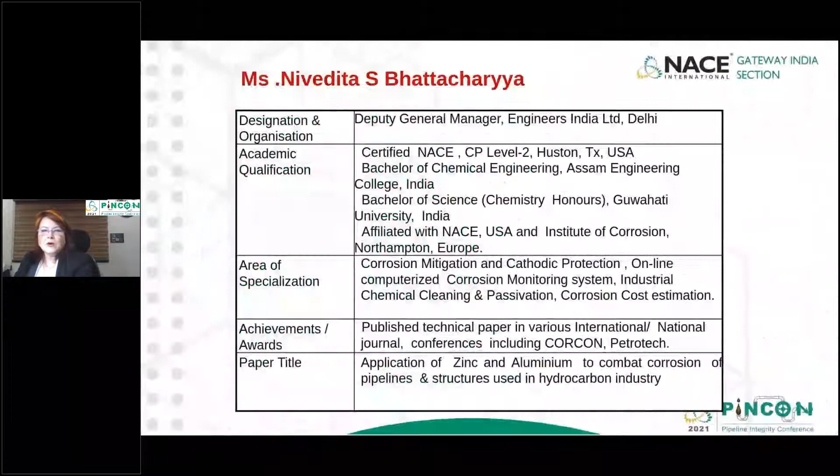Today I'll be speaking on application of zinc and aluminium to combat corrosion of pipelines and structures in the hydrocarbon industry. Why is corrosion control important? To preserve our asset, to reduce maintenance cost, to reduce inspection cost in the industry, to follow company and government regulations, and preserve the environment.

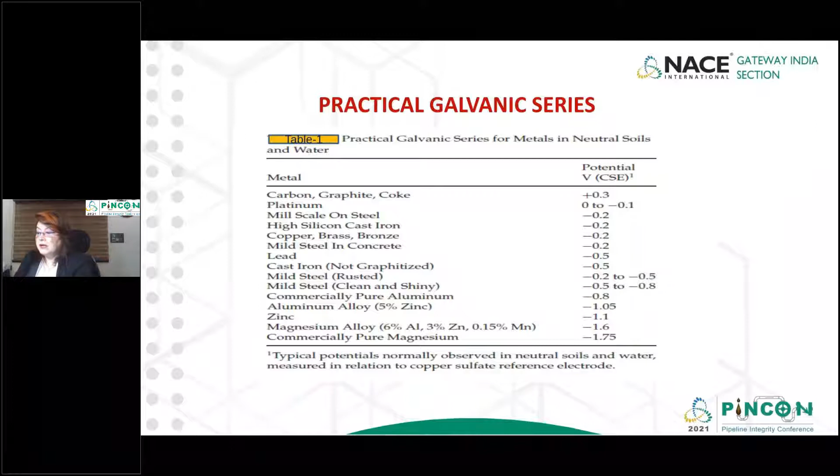Zinc and aluminum are the most abundant metallic elements in Earth's crust. It has been observed that in practical galvanic series with respect to copper sulfate reference cell, the potential of zinc is minus 1.1 volt and aluminum alloy is minus 1.05 volt in neutral soil and water.

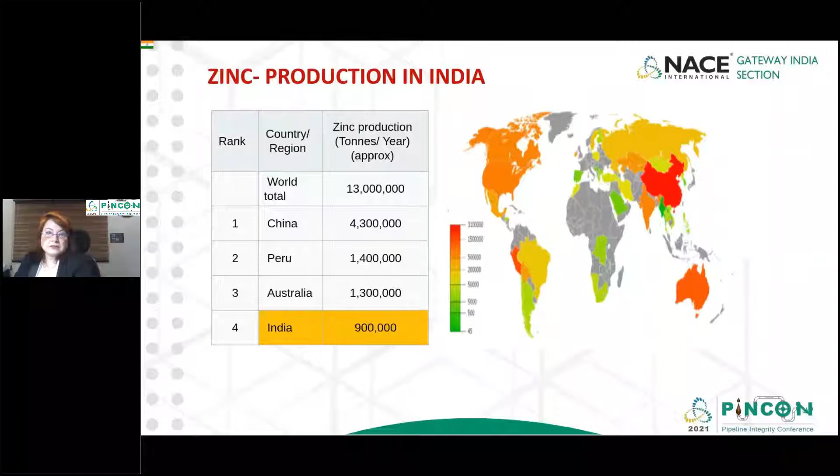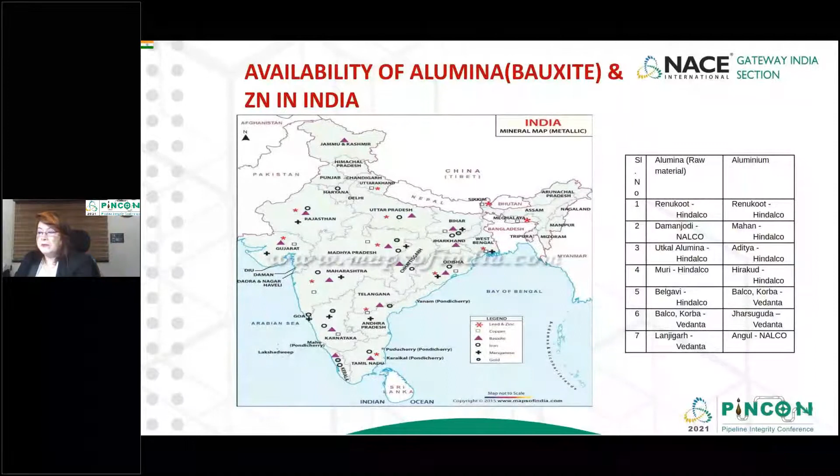At present, India has the fourth largest deposit of zinc and approximately 0.9 million tons per year production. Similarly, India has the fifth largest position of bauxite deposit in the world, which is the ore of aluminium. As you can see in the map of India, availability of alumina and zinc in different parts of our country.

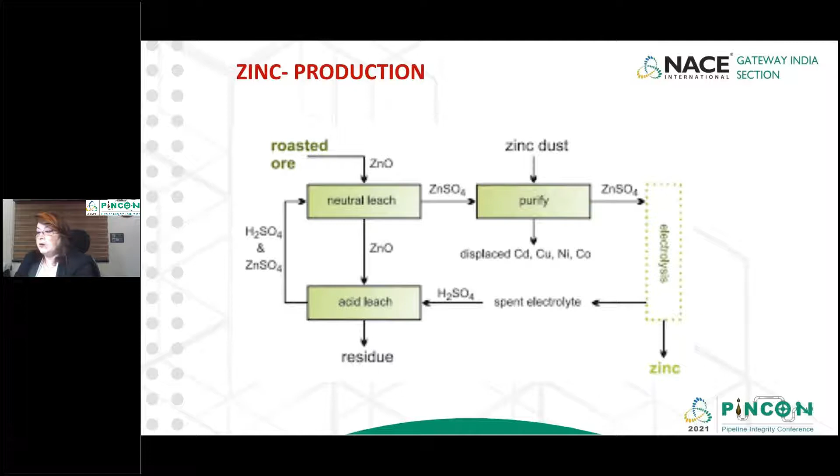Zinc is processed from zinc ore and releases sulfuric acid during production. The production of final zinc metal is a complex process involving various stages with the end goal of separating the pure zinc from the zinc ore.

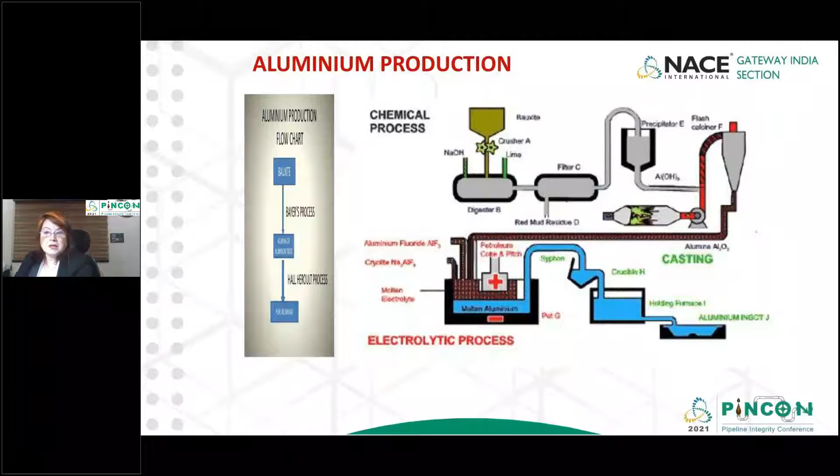Aluminium manufacture is accomplished in two phases: the Bayer process of refining the bauxite ore to obtain aluminum oxide, and the Hall-Heroult process of smelting the aluminum oxide to release pure aluminum. The Hall-Heroult method of aluminum production occurs in large refractory lined steel containers called pots that are connected in series and housed in long buildings called pot rooms.

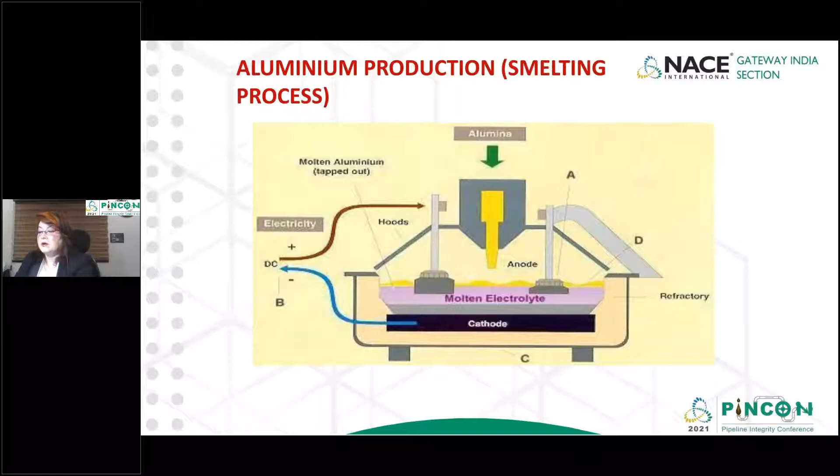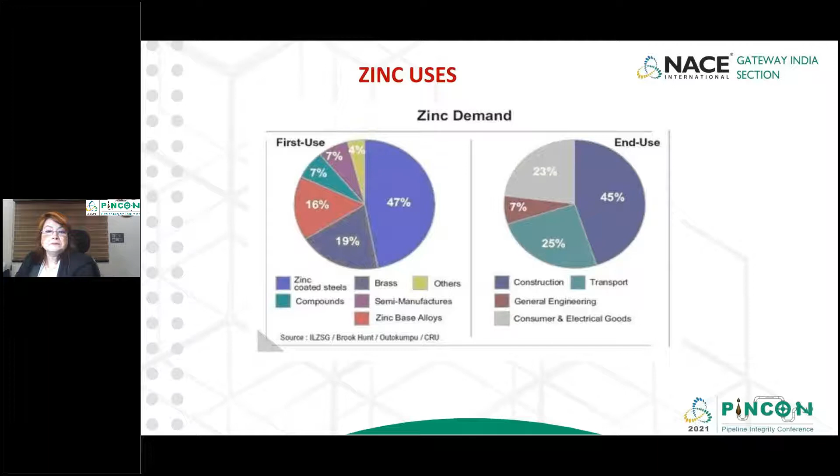As per the commodity market report and global zinc report, there is a huge gap of zinc between supply and demand in the near future.

Zinc and zinc alloy are used in various forms of coating and galvanizing carbon steel to prevent corrosion of steel, zinc alloying in brass and bronze and more, making the metal for wider application in Indian hydrocarbon industries.

By applying zinc coating for above ground various structures like piping and pipe support, pipe hangers and flanges, vessels, pipe racks, structural supports, and enclosure of test link point of anode and cathode junction boxes, transformer rectifier unit enclosures, rebar in RCC structure, etc. Similarly, for buried structures, zinc anodes are used during construction stage in low resistivity soil, seawater, offshore platform, jetty piles, ships, etc.

Hotspot protection of buried pipelines. 99% pure zinc can be used as a reference cell. Electrical earthing system of structure.

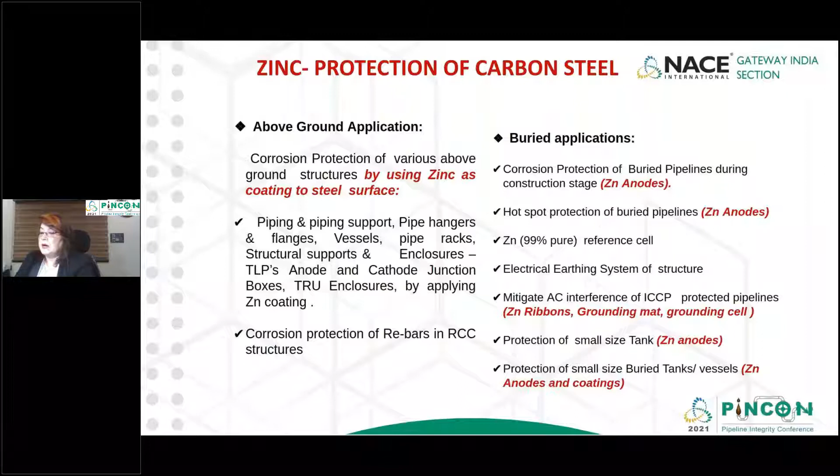Mitigate AC interference by zinc ribbon anode of impressed current cathodically protected pipeline using zinc mat, protection of small size tank by zinc anodes. Also, zinc anodes and coatings are used for protection of small size buried tanks and vessels. Some images of zinc and zinc alloy application for protection of carbon steel.

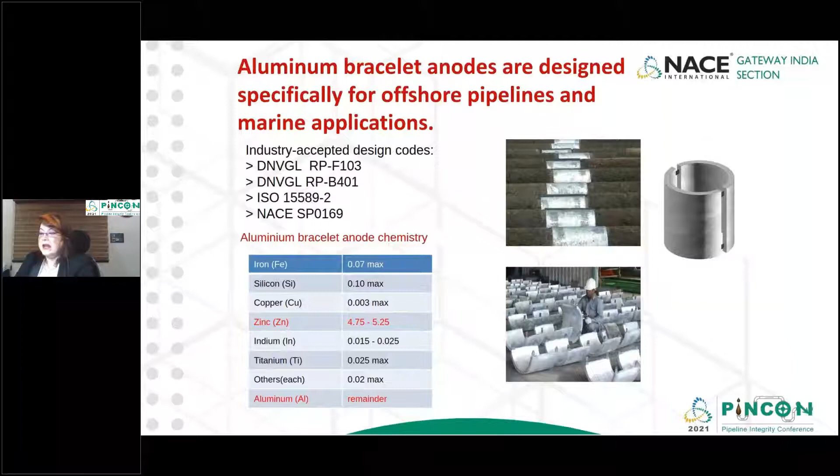Aluminum alloys are widely used in engineering structures and components where lightweight or corrosion resistance is required. You can see in the slide aluminum bracelet anode uses for offshore pipelines and marine application. Different types of anodes with different composition and their various uses in industries.

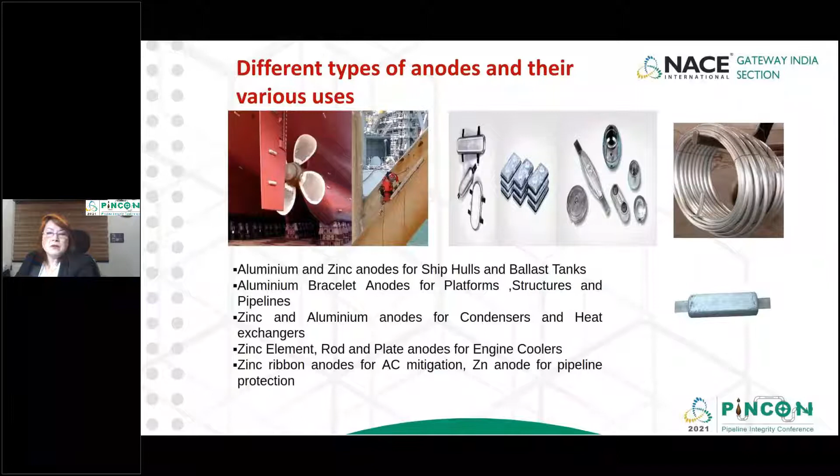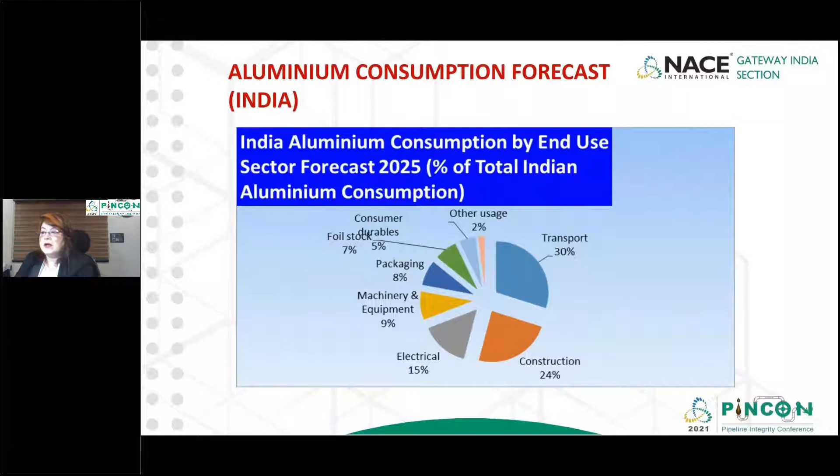Presently, total Indian aluminum consumption forecast by 2025 shows maximum 30% in transport and 24% in construction sector. The histogram shows more clearly from 2005 to 2025 the industry-wise application of aluminum worldwide.

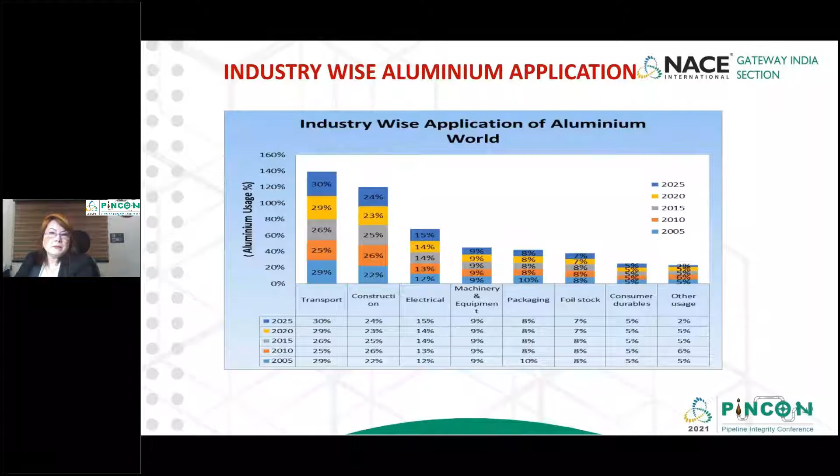Zinc protection of carbon steel by coating application. In zinc-rich paints, the zinc dust prevents the metal from becoming corroded by simply sacrificing itself, whereas metallic coating forms a corrosion-resistant protection layer that can withstand harsh environmental conditions by changing the surface properties of the metal on which it is applied.

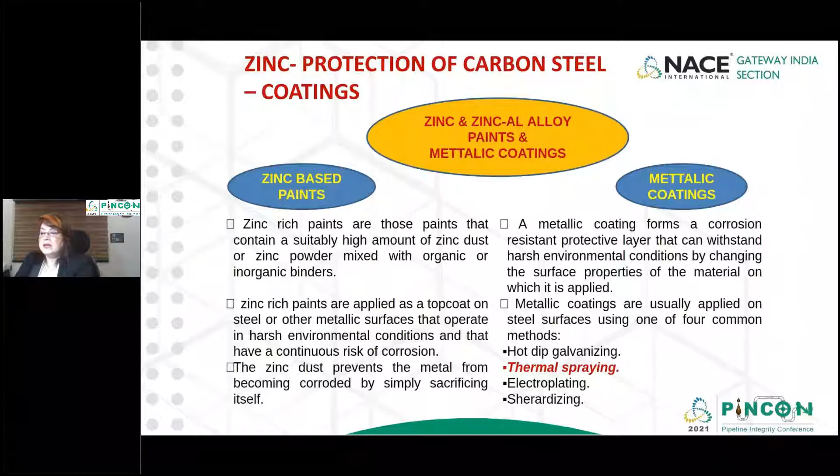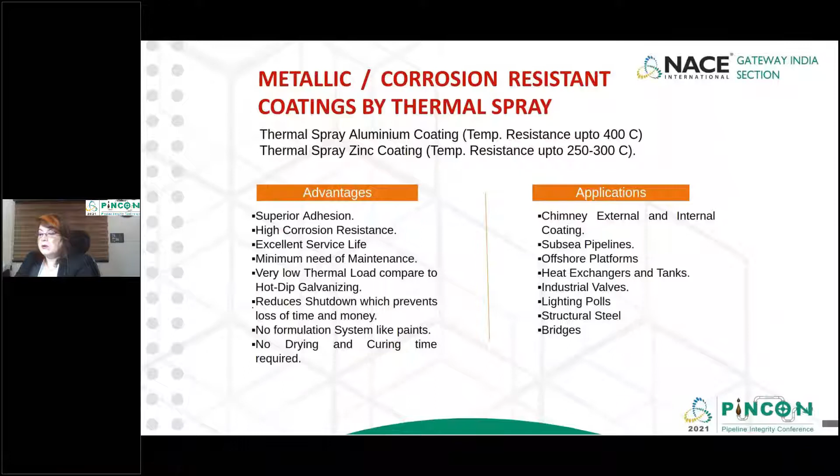Out of four common methods of zinc coating application, thermal spraying is the most common method of application. It has lots of advantages: superior adhesion, high corrosion resistance, excellent service life, less maintenance, reduced shutdown which prevents loss of time and money, no formulation system like paints, no drying and curing time required, and very low thermal load compared to hot dip galvanizing. The corrosion of carbon steel on above ground structures, you can see in the slides.

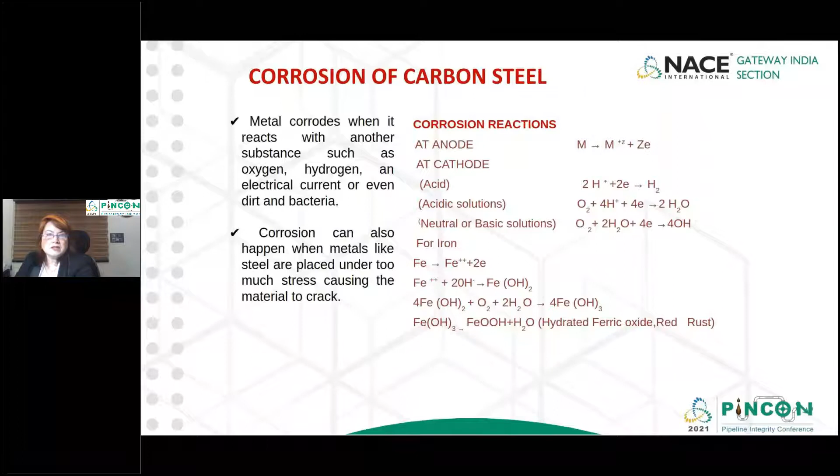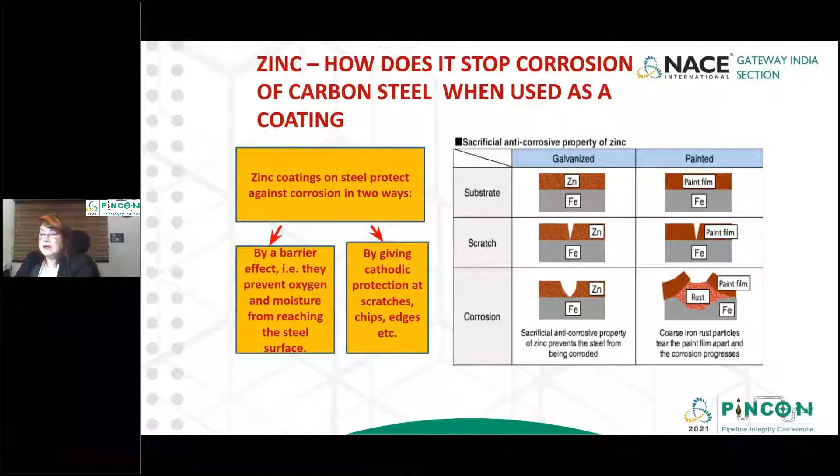Basic corrosion of carbon steel in different environments we have discussed a lot in this forum, so I'll skip this slide. Zinc coating on steel protects against corrosion in two ways: by a barrier effect that prevents oxygen and moisture from reaching the steel surface, and by giving cathodic protection at scratches, chips, edges, etc.

When organic coating is provided as barrier protection for above-ground structures, if the coating is damaged, steel corrodes freely and forms ferric oxide. These are normal paints. You can see the formation of ferric oxide, which shows corrosion has started.

Whereas in zinc metallic coating, zinc oxide forms an active layer and protects the structure. The formation of zinc oxide protects the layer, as electrons pass from the zinc layer and protect the affected part, so there is no corrosion.

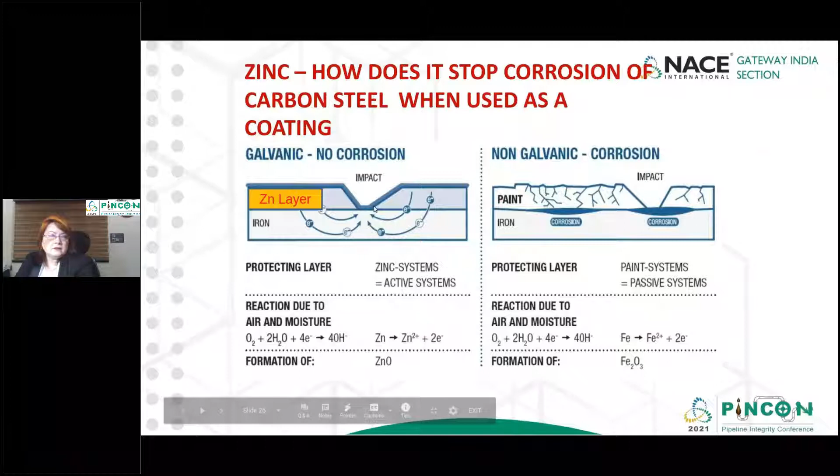As you can see, zinc stops corrosion of carbon steel when used as a coating, compared to organic epoxy paints. With simple organic epoxy paint, this cracks, then the coating fails, and corrosion starts with rust formation here.

When zinc is applied on carbon steel, the zinc becomes anodic and there is no corrosion of the steel. The electron moves towards the carbon steel in the affected area.

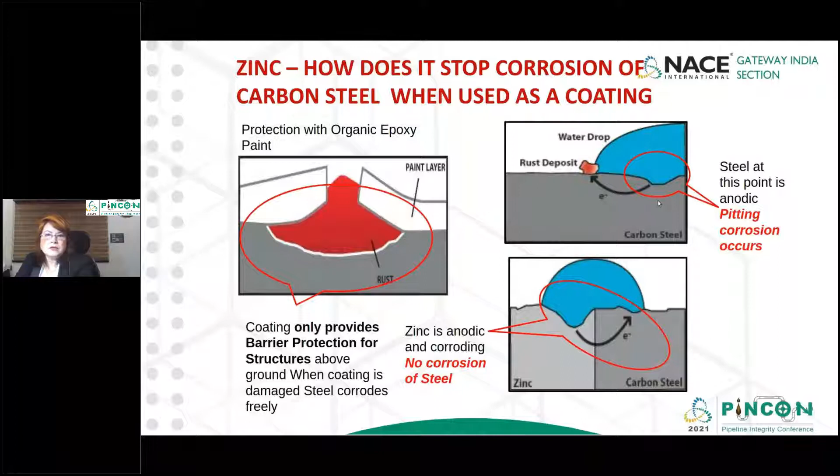This is pitting corrosion occurring with normal epoxy coating. With epoxy-based coating systems, atmospheric corrosion occurs after 5 years of application. This is a normal epoxy coating that was used, showing the condition of the structure in a coastal area. This photo was taken from one of the coastal area refineries.

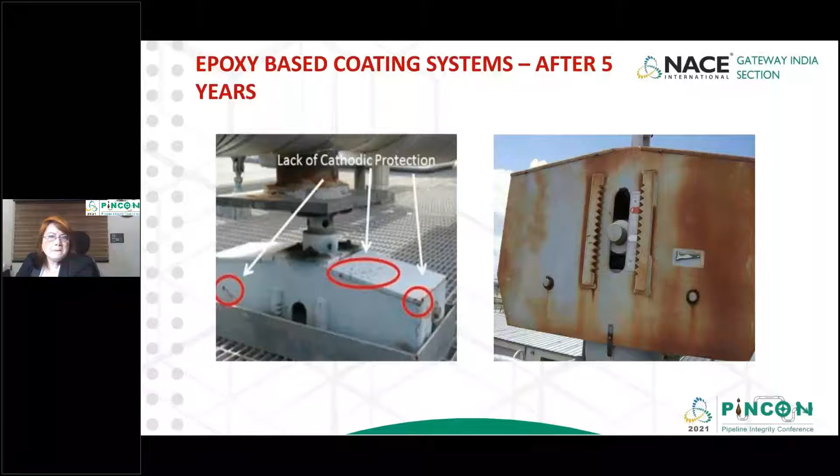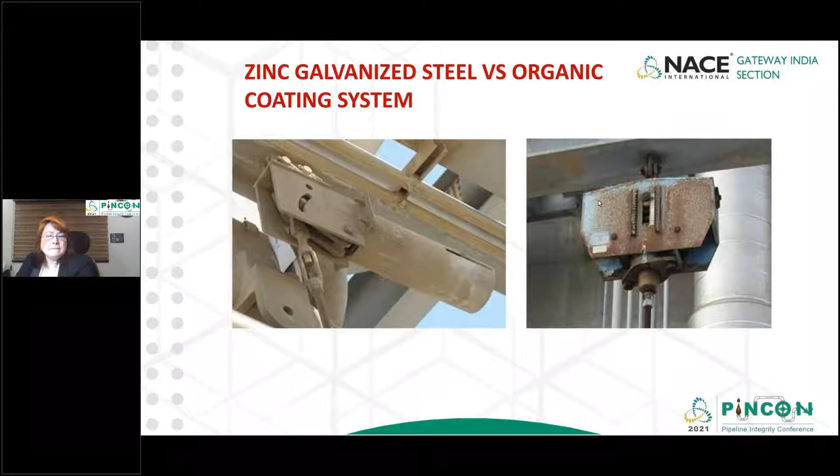Zinc galvanized steel versus organic coating system: we see there is no corrosion occurring again with zinc against an organic coating, compared to a galvanic system where simple organic coating corrosion starts.

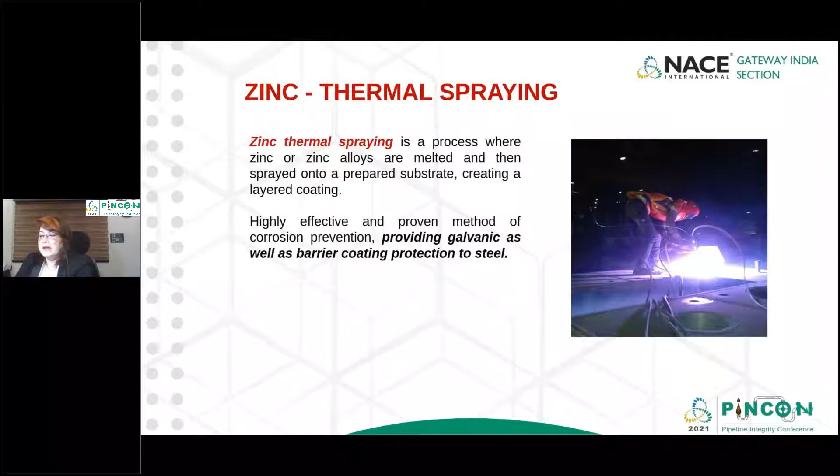Similarly, in the case of pipe and pipe support applications, zinc or zinc alloys are melted in the zinc thermal spraying process and then sprayed onto a prepared substrate, creating a layered coating that gives both galvanic and barrier coating protection of steel. As the heat energy in the molten particle is small relative to the size of the sprayed component, the process imparts very little heat to the substrate.

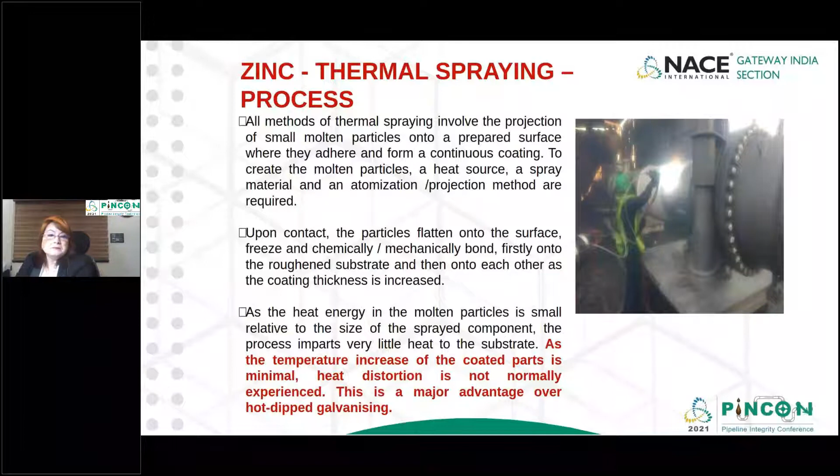Pure zinc sprayed coating started since the 1920s and is typically applied at a thickness of 100 to 500 microns. The zinc and 15% aluminum thermal spray coating was introduced in the late 1970s.

Because the microstructure of each droplet of the sprayed coating consists of both zinc-rich and aluminum-rich phases, zinc and 15% aluminum provide optimum corrosion protection to steel in aggressive atmospheric conditions like marine environments, especially against pitting corrosion.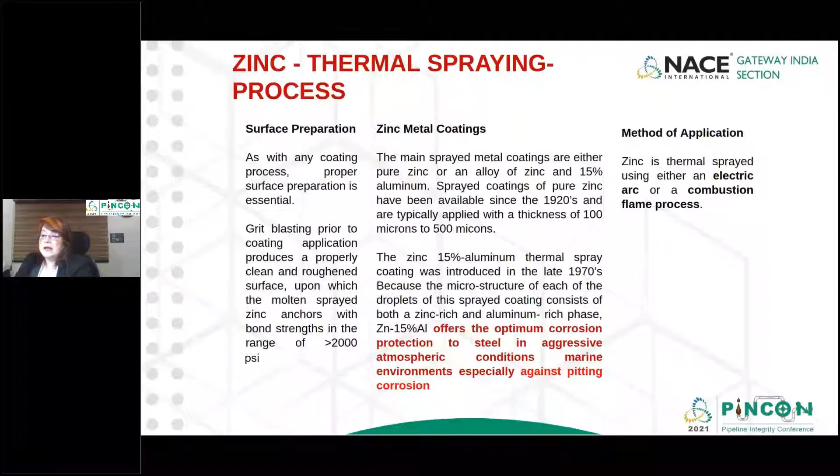There are two types of zinc thermal spray coating application: electric arc or combustion flame process. Electric arc spraying feeds two electrically oppositely charged zinc metal wires towards each other and produces an electric arc at the point just before the two meet.

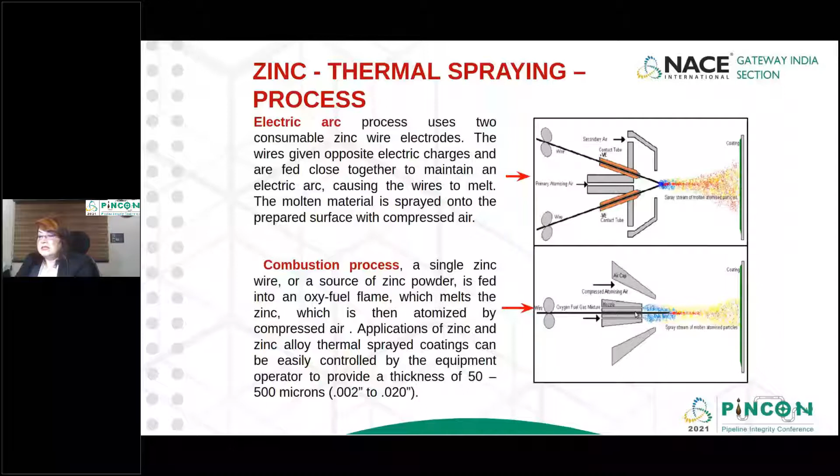As the arc melts the metal wires, high pressure air lines are used to spray fine droplets onto the properly cleaned and prepared metal surface. Whereas in the combustion process, a single zinc wire or a source of zinc powder is fed into an oxy-fuel flame which melts the zinc, which is then atomized by compressed air.

Advantages of zinc thermal spray coating: it's possible to apply from 50 to 500 micron thickness. Spraying can be carried out either in a shop or in the field. It can apply zinc coating to structures and components too large for hot dip galvanizing, such as many bridges, sections and structural members, covering all grades of steel, including highly alloyed steel.

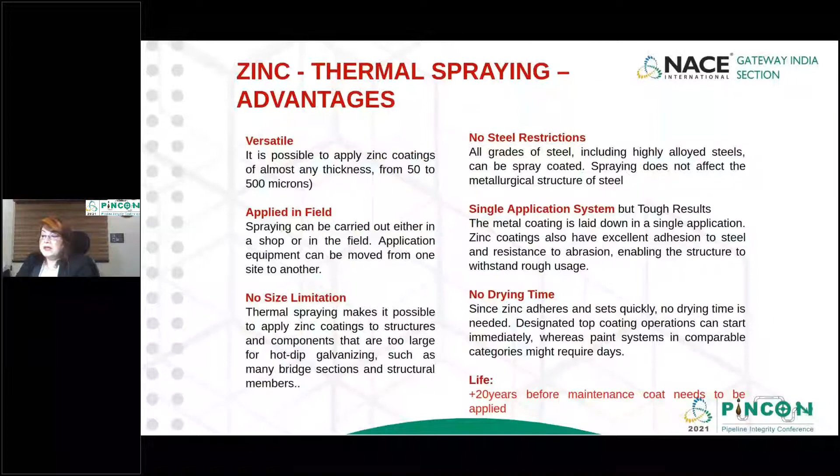The metal coating is laid down in a single application, with excellent adhesion to steel and resistance to abrasion, enabling the structure to withstand rough use. No maintenance is required before 20 years of lifespan.

You can see in the slides thermal spray zinc application in various structures: flare stacks, structural members like ISMB sections, bridges, nuclear reactors, and windmill bearings.

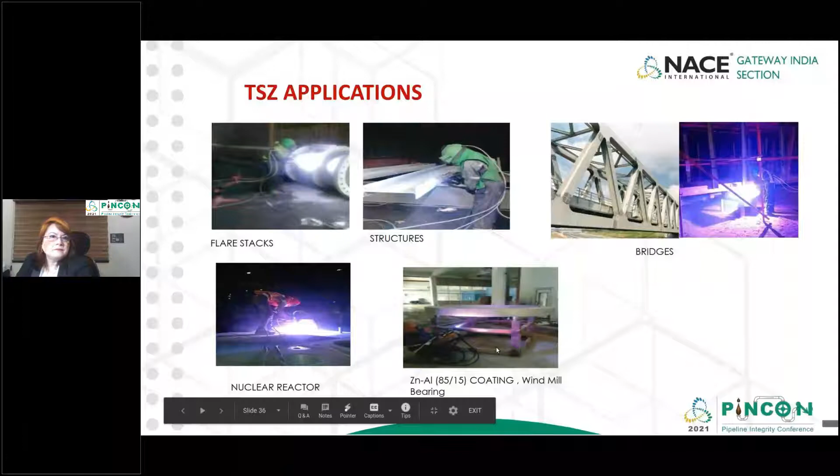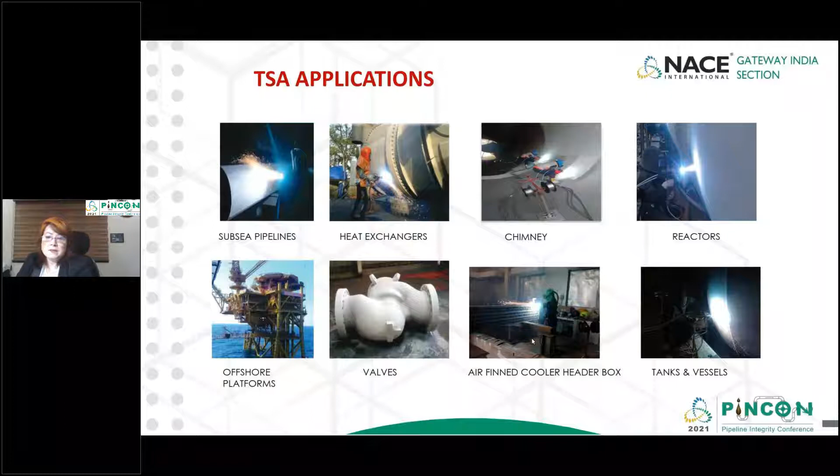Similarly, thermal spray aluminum coating is applied in many structures such as subsea pipelines, heat exchangers, chimneys, reactors, offshore platforms, valves, air fin coolers, header boxes, tanks, and vessels.

Now, coming to the point of zinc thermal spray life cycle cost. Zinc thermal spray coating compares favorably in cost to modern three-layer paint systems, especially when considering factors like lifetime cost, no volatile organic compound regulation, and a robust coating that can be applied offsite before installation.

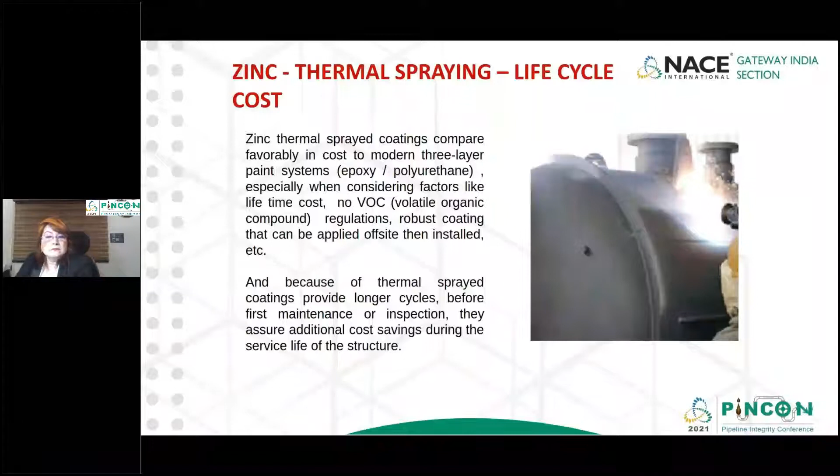Chimney internal and external coating was done by aluminum spray coating on an offshore platform, where the top coat was vinyl sealer, and on the flame stack, silicon aluminum was used. No maintenance has been expected since 1987.

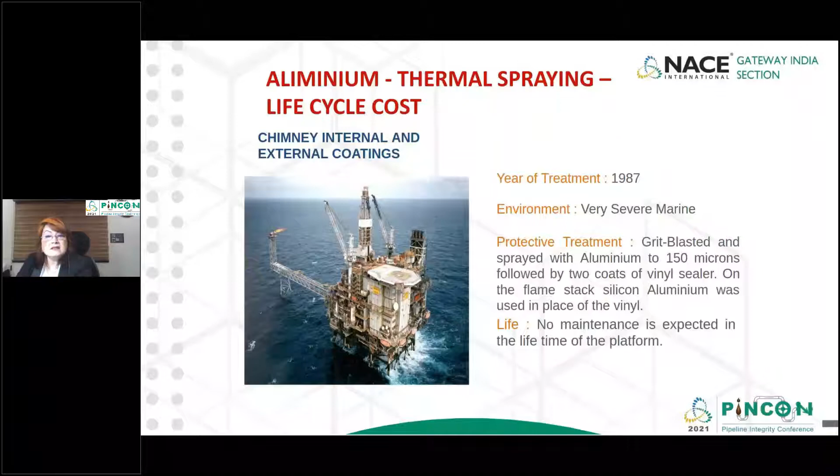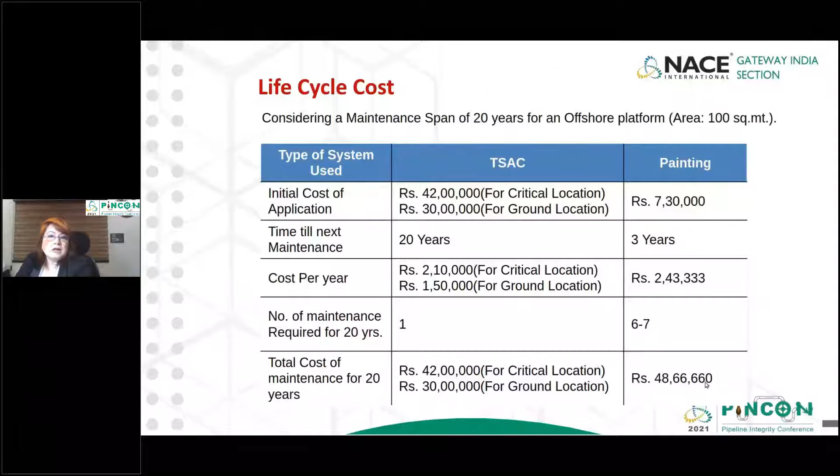It is the same for critical location and 30 lakh rupees for ground location, whereas in painting application it is 48 lakh 66,000 rupees, which is more than the thermal spray aluminum coating after 20 years of lifespan.

According to the life cycle cost analysis, maintenance requirement in painting is rather frequent. However, in thermal spray aluminum coating it is almost nil. The number of shutdowns increases and there is a loss of production in case of paint application.

Though the initial cost of thermal spray aluminum coating is more compared to painting, it offsets the frequent maintenance requirement in painting and loss of revenue due to shutdown. Also, the cost of maintenance per year in painting is higher due to increasing inflation rates for painting.

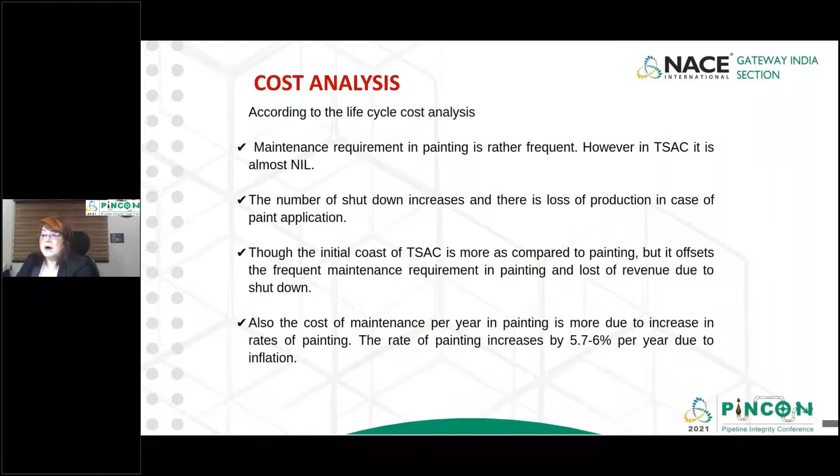Challenges of aluminum and zinc in industry: the setup of a new facility with zero discharge technology, incorporating the latest technology, automation, and the highest standards of environment and health safety compliance, with the lowest cost smelters.

Generation of lots of fluoride emission from smelters and sulfur dioxide from power plants in aluminum production.

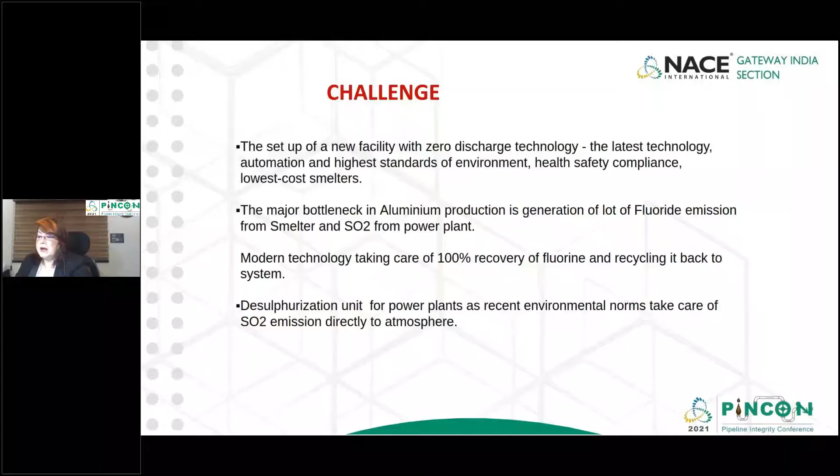Modern technology takes care of 100% recovery of fluorine and recycles it back into the system. A desulfurization unit is a must for power plants, as recent environmental norms address sulfur dioxide emission directly to the atmosphere.

As per BS EN ISO 2063 standard, it specifies the requirements of corrosion protection coating by thermal spraying of zinc, aluminum, or their alloys in case of new fabrication in the workshop, as well as on site, and for repair on site after assembly. It also covers coating manufacture, surface preparation, thermal spraying, testing, and post treatments such as sealing of the coating.

This document covers the application of thermal spray zinc, aluminum, and their alloys for protection against corrosion in the temperature range between -50 degrees centigrade to +200 degrees centigrade.

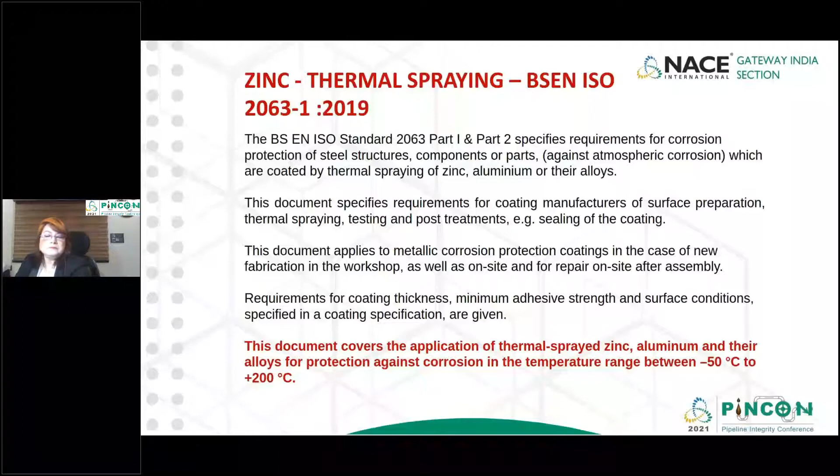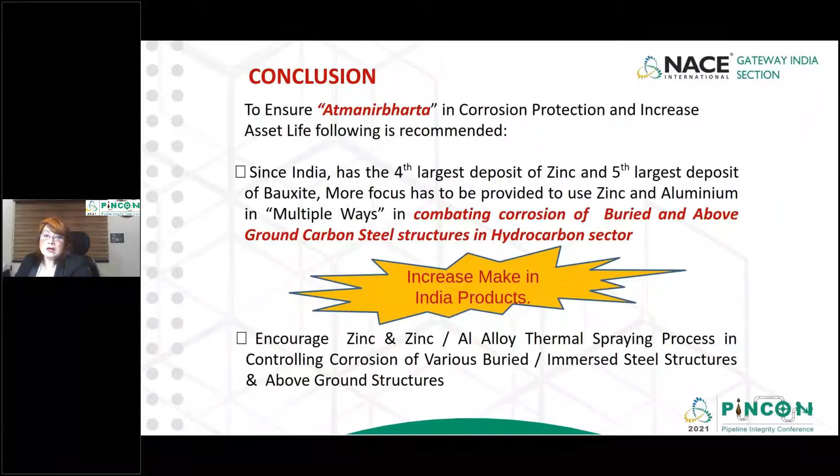To ensure our Atmanirbharta in corrosion protection and increase asset life, the following is recommended. Since India has the fourth largest deposit of zinc and fifth largest deposit of bauxite, more focus has to be provided to use zinc and aluminum in multiple ways in combating corrosion of buried and above ground carbon steel structures in the hydrocarbon sector.

Encourage zinc and zinc-aluminum alloy thermal spraying process in controlling corrosion of various buried and immersed steel structures and above ground structures. Encourage new Indian vendors for manufacturing zinc and aluminum anodes and zinc ribbon anodes as per international standards. India stands in fifth position in world captive bauxite reserves.

However, it produces one-tenth of China's annual quantity, that is 3.5 million tons per year against China's 33 million tons per year. So there is a huge gap in alumina production between India and China.

India has huge coal reserves in the eastern part of the country, especially in Odisha, and generating power from coal to convert to aluminium is a huge opportunity for India.

India shall reap all the benefits by producing aluminium and zinc to meet both domestic and international demand. Thank you.